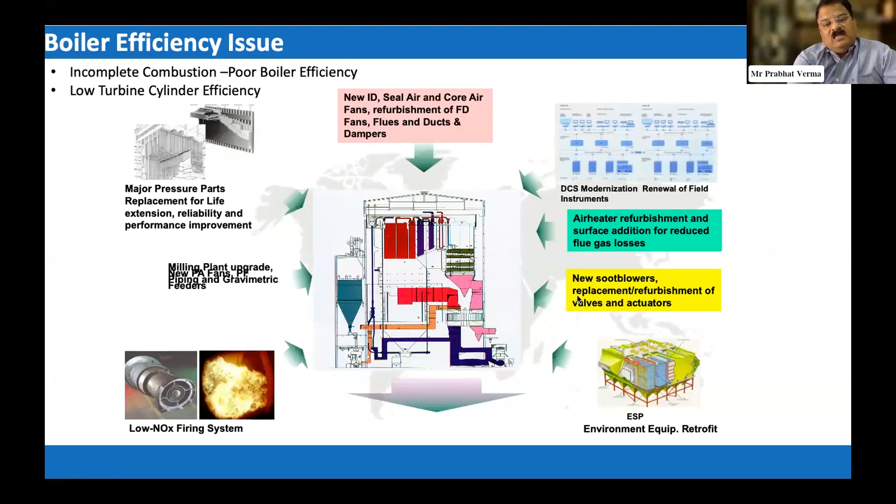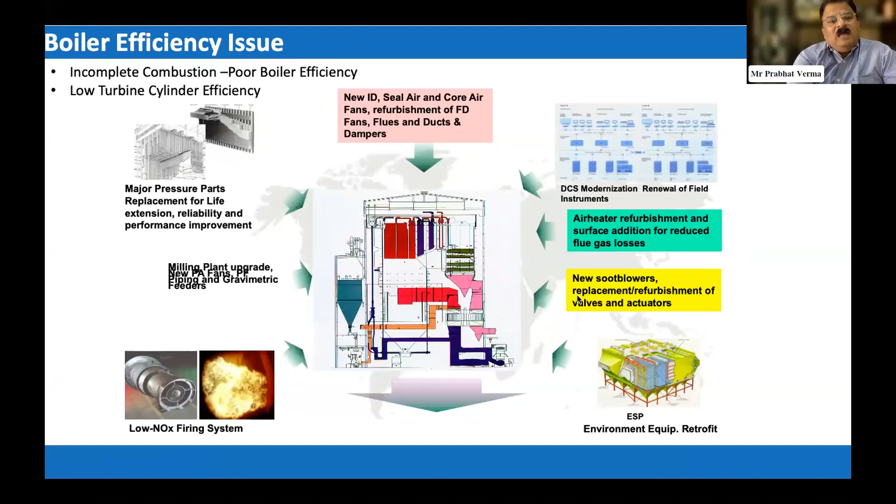I think whatever I talked till now, it is all summarizing and repeating. There is nothing great, nothing new. Now I am a strong believer that boiler tuning, we talked so many things. We talked about flexibilization, we talked about air fuel ratio control, we talked about efficiency, we talked about unburned carbon. I think it all revolves around the boiler tuning.

And if Mr. Chandrasekhar is there, probably he can comment on it. So boiler tuning, somehow I have seen it is like our car. We buy a car, but we hardly go for tuning. We keep on filling the petrol or diesel and keep on running. So boiler tuning is important.

And here I have shown the benefits of boiler tuning: minimizing the unburned fuel, reduced tube failures, improve combustion balance, minimize energy losses, scale down fouling, reduce slagging, diminish corrosion, and of course SO2, CO2, and NOx emission.

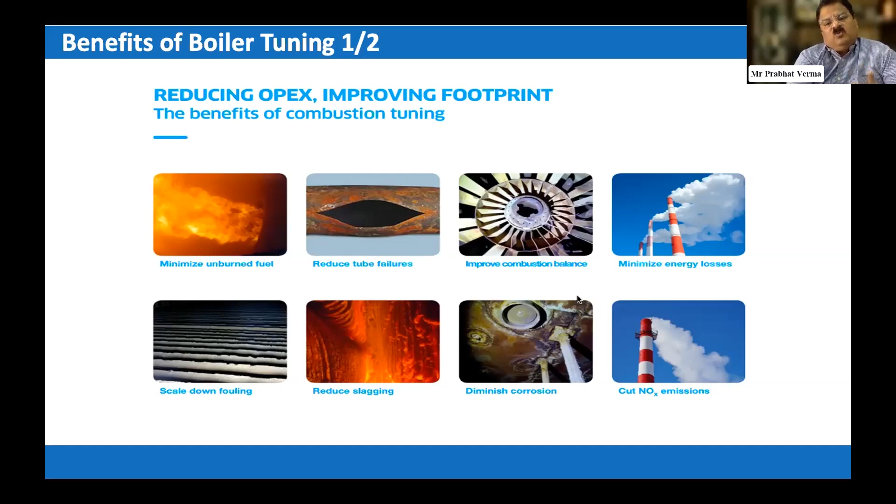So boiler tuning is important. It is related to the O&M day-to-day performance, and I think we must do boiler tuning twice in a year. So these are the benefits. I already shown you the picture in the photograph. This is written in the text, same thing. But boiler tuning is important, which somehow we have no habit to do it on a regular basis.

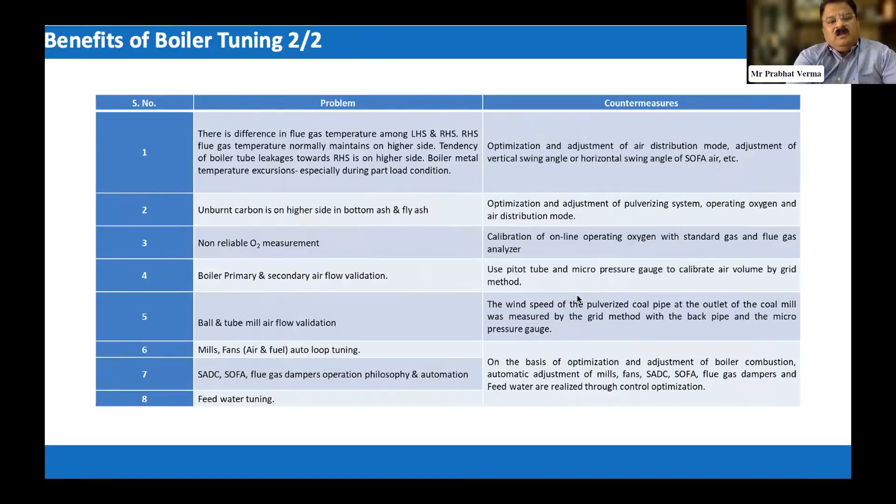Now, everybody talks about a retrofit, a renovation and modernization. With my experience, I wanted to share that when the turbine is retrofitted and it is ready for the highest level of performance, the boiler should be capable of doing and supporting that with the required steam, temperature, and pressure.

So in our experience, what we did, and many state boards and many customers followed, is that they had done the reheater modification also. Just to share, because many a times it is missed, and many a times it creates confusion, because the R&M package of turbine generally is handled by a turbine manufacturer, and then the turbine manufacturer is mostly interested in turbine 3D blades and all those, but he is not bothered about the reheater modification.

So in many cases, what we did, we try to educate the customer and tell them that reheater modification is also important. And I'm sure our colleagues from NTPC and other power companies will agree to it and see that in their future R&M, reheater is given due respect.

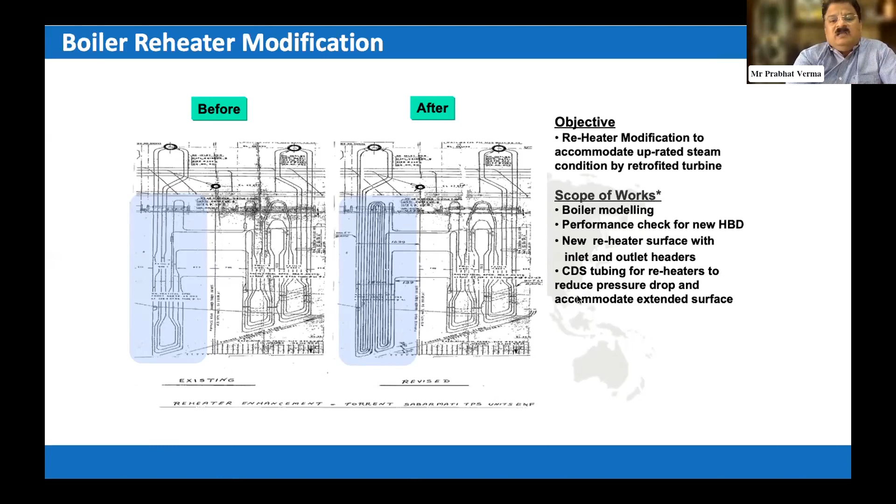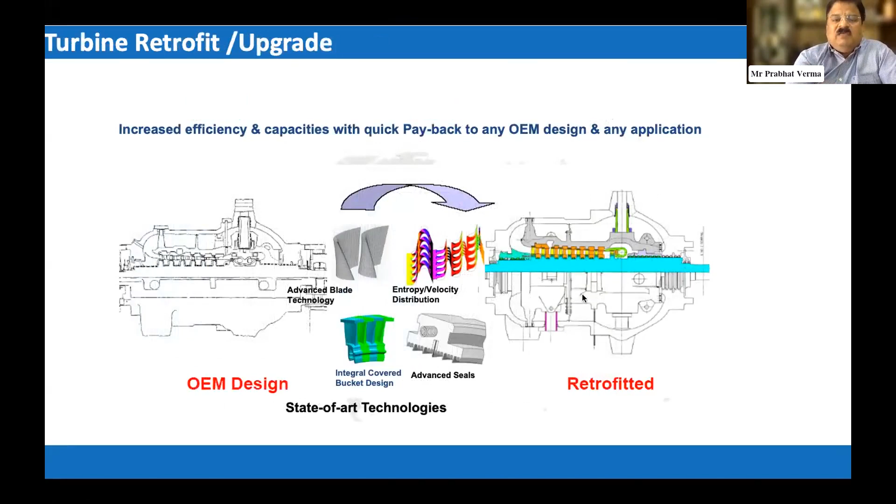Turbine retrofit, it is all generic photographs of how it is done. Just seeing is believing. So just to give you a feel, generator upgrade: there are generators which have a lot of margin, and if it can generate more megawatt, it is not bad.

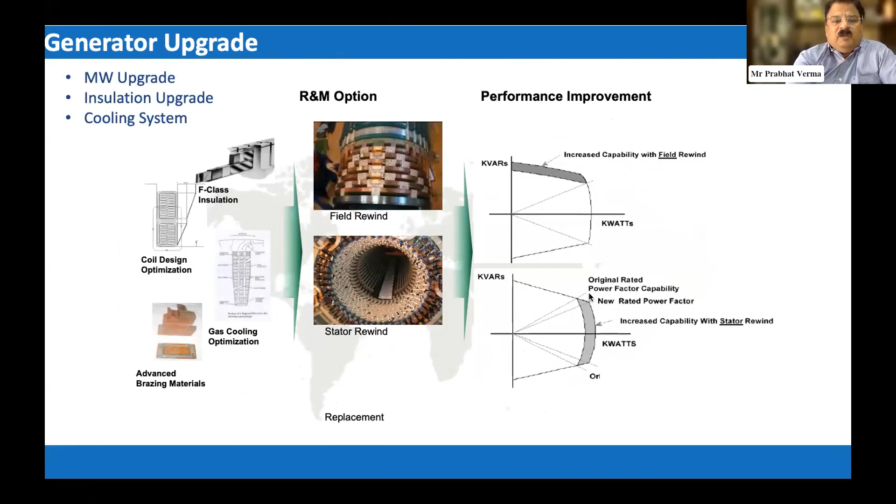As I shared with you about the station, it was increased from 110 megawatt to 121 megawatt. So a lot of margins are there, and this is the time to optimize, to extract the maximum available capacity of the equipment. Now, AQCS upgrade, we already know that FGDs and SCR, ESP, ZLD, all those things are also important to reduce the emissions and effluent and the toxic things which are affecting our operators and surroundings, and causing bad health.

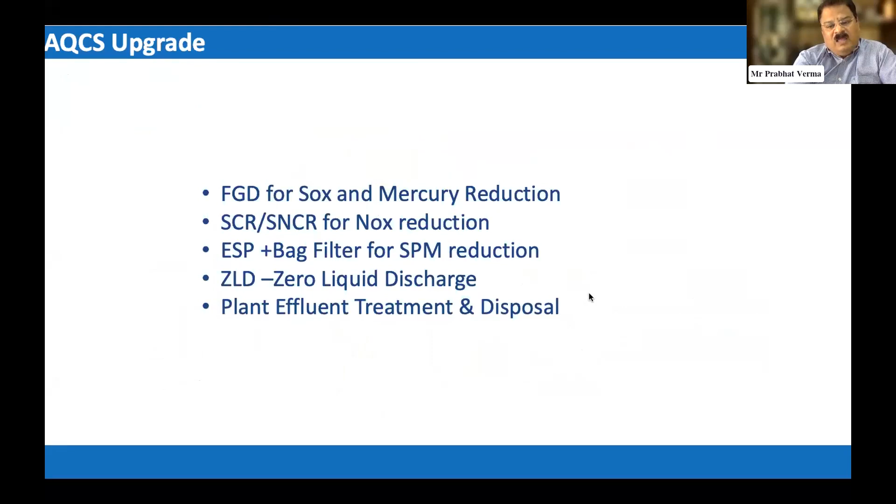So this is important. Benefit of retrofit: there is a case, Ukai Wanakbori, it is taken from the public domain, and you see the difference before R&M and after R&M. So it is evident and clear that RNM has to happen.

RNM is a tough task. I know many utilities are not very keen because it requires time, it requires a lot of patience, it requires sharing of a lot of information, and probably this is one of the reasons RNM has not become very, very popular in this country. Even if RNM happened, it took a lot of time.

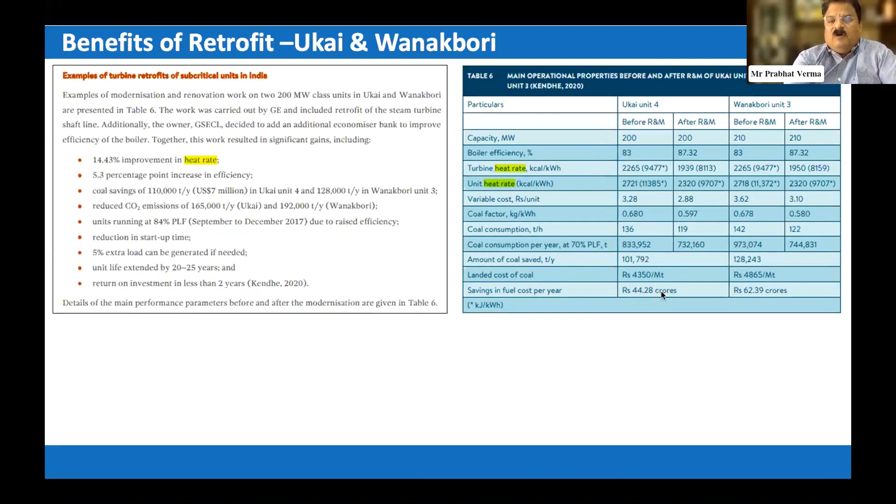I mean, it took years, and people who started the RNM procedure, both on the customer side and the OEM side, they retired, but RNM never took place. So this is the time, since coal-fired power plants are to be kept alive, RNM is important.

And I have taken a list of some of the plants which I could find the data for. Here it is basically a 76,000 megawatt Chinese fleet in India. Why did I take Chinese? Because Chinese are labeled bad for many things, design, so many issues, so many challenges. So what I did, I took the data from the Chinese plants, right from 61.5 megawatt to 660 megawatt, and I tried to do some kind of analysis about their design heat rate and the heat rate improvement which is possible. And during the process, it is just indicative numbers.

I mean, these numbers are not the accurate numbers, but very close to accurate. The idea was to tell you how much coal can be saved if all these plants are done with retrofit, renovation and modernization. And you see yourself, there is a per megawatt 286 ton saving in a year, and huge money which is saved, around 7,634 crore is going to be saved, only from the coal saving itself.

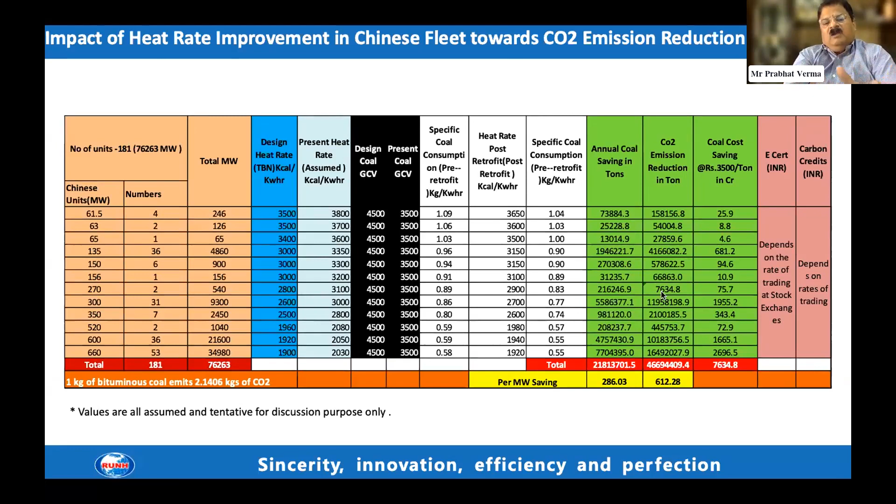So it is not only coal saving, there is a tremendous amount of CO2 emission which is reduced. 1 kg of bituminous coal emits 2.14 kg of CO2. So overall, just to give you a feel, there is a large fleet of 76,000 megawatt. Every power plant is stressed. Efficiency is a big issue in most of the power plants. Heat rate is a big issue. So if those are all corrected, there is a significant amount of cost saving in terms of transportation of coal, SPM, ash, so many things which cannot be quantified, but which can be taken benefit of.

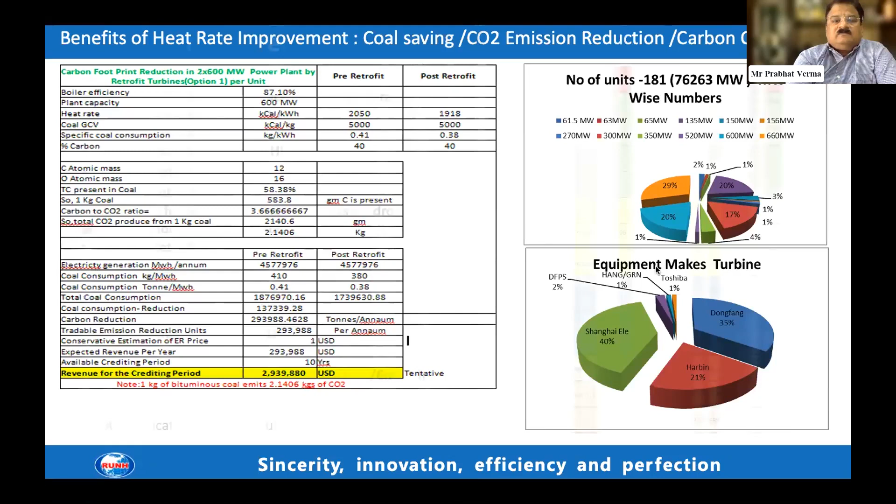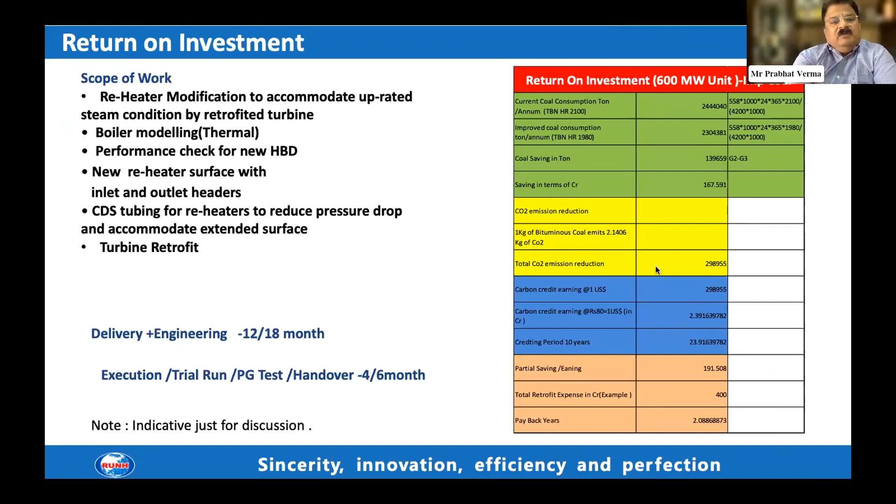So a big amount of money can be earned, a big amount of benefit can be given to the employees in terms of better health. So this is just to give you a feel of the benefit of carbon credits, and carbon credit and carbon market is going to rule this country, and carbon has to be reduced. So return on investment, another case. Here I talked about some payback on R&M, which is around 2 to 3 years. Again, it is very case specific. So just to give you a feel in terms of commercial benefits.

Now, heat rate improvement opportunities and challenges, you all know. Challenges are aging staff, no interest, and you have seen in the last 30 years there has not been much attraction for new engineers to come to the sector. So that is a challenge. Regulatory norm is a challenge. Loose PAT target is a challenge. Failed E-cert scheme is a challenge. Carbon credits are a challenge. Not attractive. Funding issues are a challenge. Limited companies doing it, and the knowledge. And opportunities are, most of the plants are stressed, proven and sustained R&M projects, good payback, OEM with retrofit technology, faster executions. So these are the benefits.

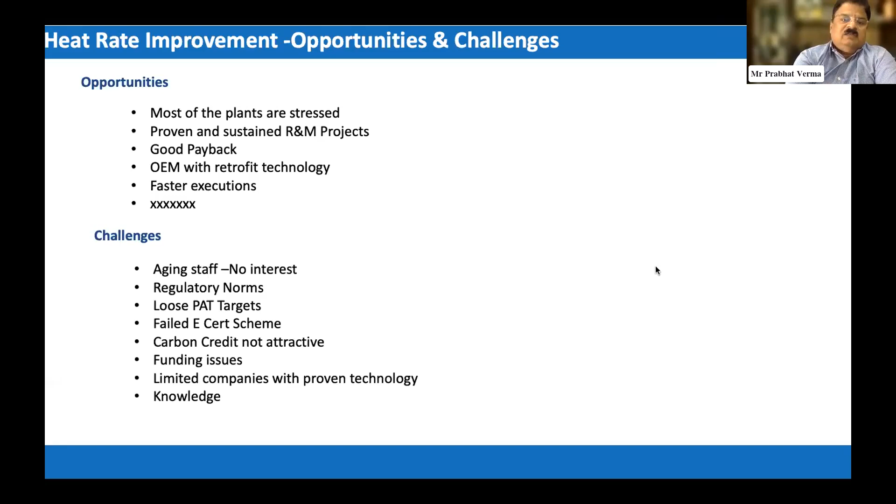Now, my main topic today is to talk about repowering. The idea is how to reduce the carbon and how to use the existing asset. All these coal-based power plants are very heavily designed. Basically, they are over-designed. And once you abandon them, it goes at the price of scrap, which is not the right approach. So these assets and infrastructure can be utilized in many ways. I have gone through what is happening globally, and I have seen many things happening across the globe. So instead of looking towards the globe for everything, why not we start doing this activity and using our stranded assets for various purposes.

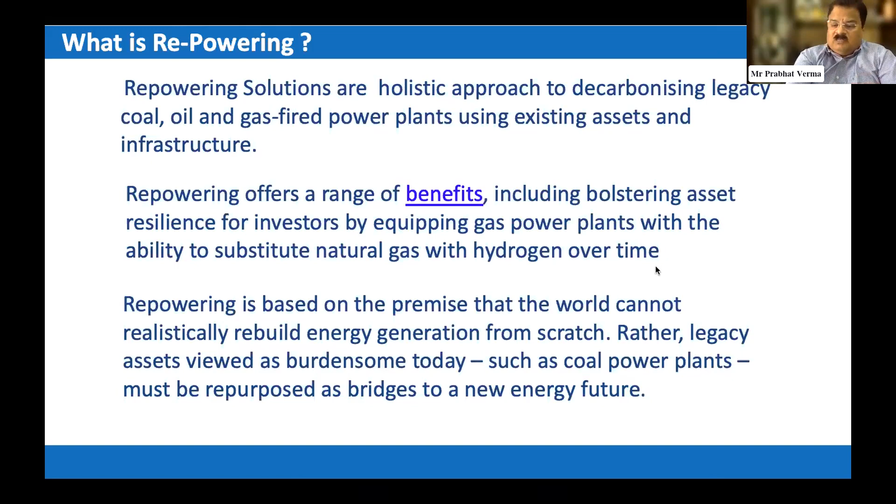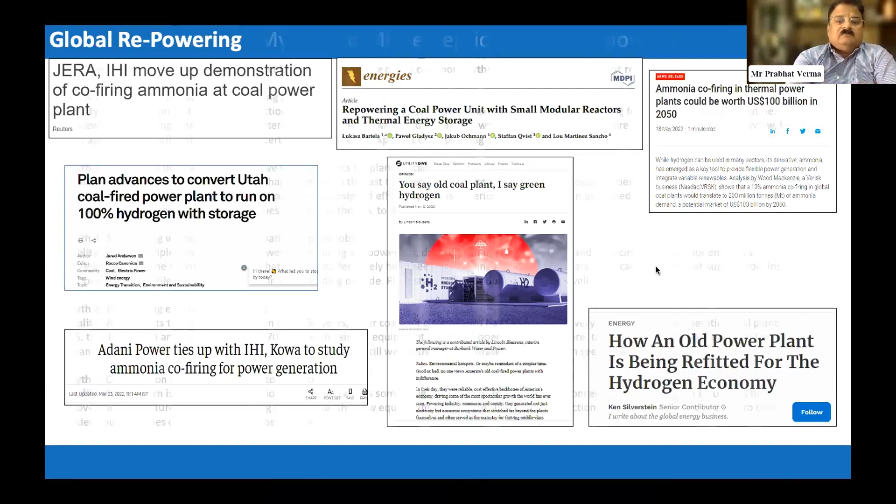So here I have just tried to put my knowledge about repowering, what is going on globally. These are the information I gathered from the public domain, from the media, about many activities happening on the repowering front. Repowering is all about low carbon, no carbon, using the infrastructure and the asset which is available. Now, there are myths around repowering globally, which are answered here. I will share these; I am not going to read it. The first myth is it is too hard to budget a repowering project. It all depends on the willpower. It all depends on your best plan and the engineering abilities and your own ability to sell the outcome of the project. So there is nothing which cannot be budgeted.

Repowered units are not competitive with new units for plant efficiency. Again, this is a myth. It can be proved wrong. There is a lot of engineering capability in our country. There are great consultants. Repowering will lead to the elimination of power plant jobs. It is not true. There are projects globally where the coal-based power plant, because definitely power plant closure is going to create a problem. And India is already suffering. The coal sector has suffered a lot in the last few years because there has not been much focus on coal-based power plants. Though the government never said that coal power plants will not be there, because we have seen a lot of tenders recently from NTPC and they are getting awarded. So coal power plants are going to remain there.

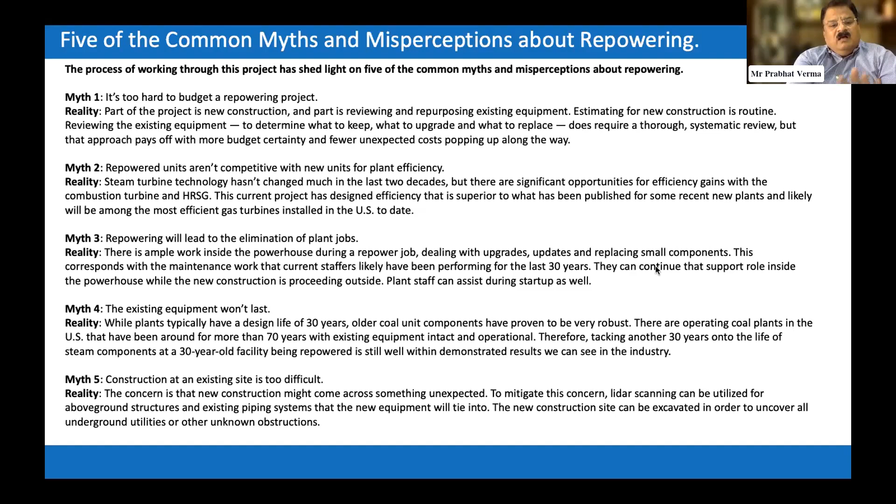And the fourth myth is the existing equipment won't last. Fifth myth is construction at an existing site is too difficult. So all those things are not very relevant, but these are the thought process of people who think about repowering. We can read the answers. I will share the slides for posting on the website.

Now, oxy-fuel technology, it has been discussed a number of times. It's a proven technology, and I personally feel that oxy-fuel can give a good solution to zero emission, because we are targeting net zero by 2070. So oxy-fuel is not something new for us. It's a matter of taking a challenge and working on it.

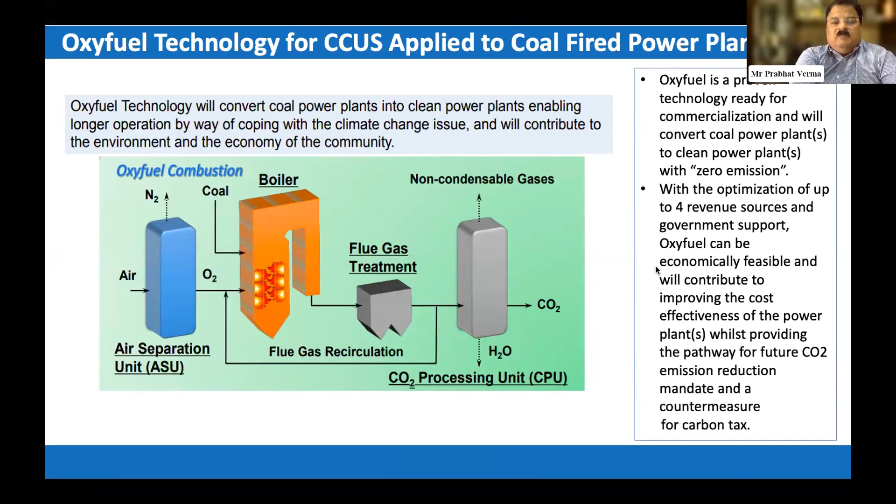So here I have tried to show you a pictorial view of how air separation happens from the air. Oxygen goes for the combustion, coal is added, and then there is FGT, flue gas treatment, and this is how the plant works. So oxy-fuel is one technology which definitely we need to opt for. It has been a proven technology, slightly costly, but I believe if government subsidy is available, it can be made feasible.

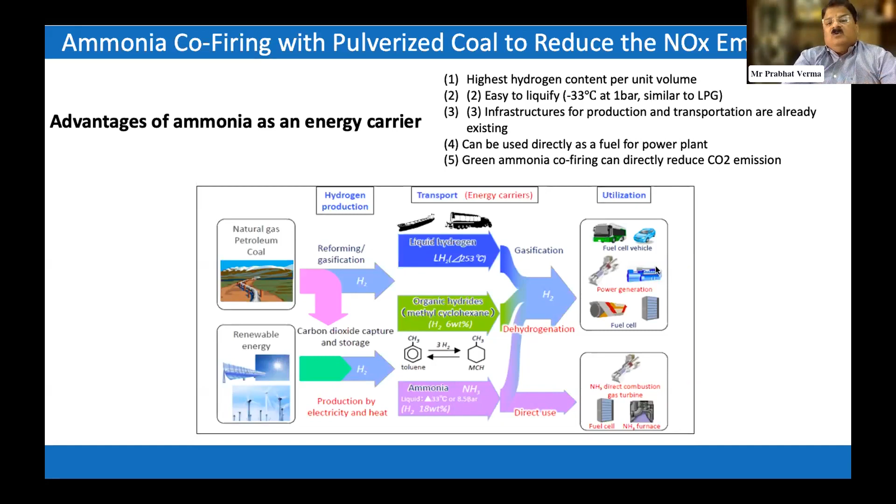Ammonia co-firing, a lot of discussion happening now. Ammonia can be generated from hydrogen, and ammonia is being co-fired in the same coal boiler. IHI has taken the lead, and in India also, I was reading somewhere, Adani has tied up with them. So green ammonia firing is all about reducing the CO2 and using the same boiler with little modification. So this is ammonia co-firing with pulverized coal to reduce the NOx emission, the CO2 emission and SOx emission.

Now, replacing a coal-fired power plant with a combined heat and power gas plant. This is a project which is happening in China. And yesterday, after listening to Ranjan, I found that China is much more aggressive than us on various measures to reduce CO2 emission, though their targets are 2060. And they are a 29% emitter of carbon in the world, and probably their generating capacity must be 5 times what we have in India.

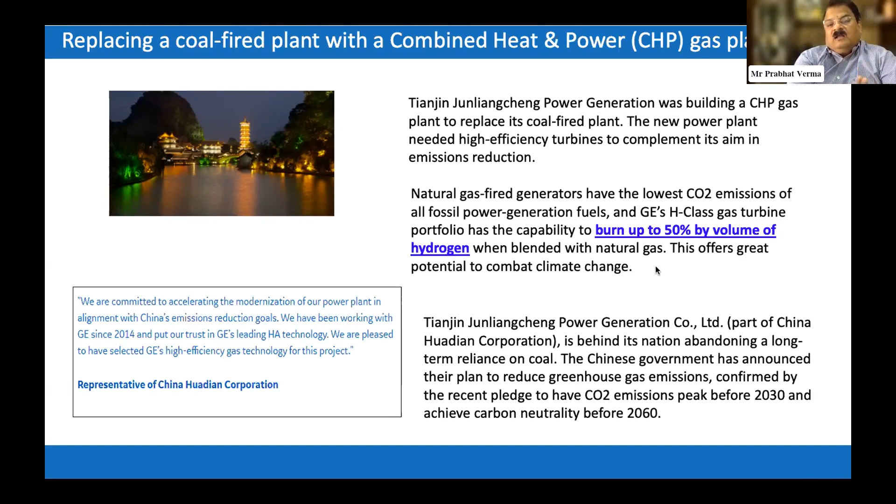So this is the project which is being done for them by GE. So we can have a similar project, and this is going to be beneficial. It is going to be neutralizing carbon and carbon reduction. Even hydrogen can be burned there.

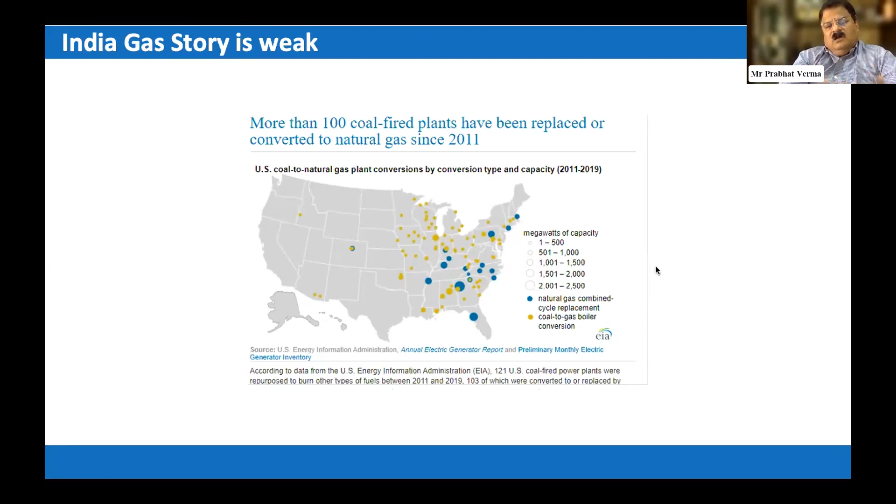Now, in the US, more than 100 coal-fired power plants have been replaced or converted to natural gas since 2011. Somehow, India's gas story is weak, so we cannot talk much about it. But there are turbines available where 50% hydrogen and 50% natural gas can be fired. So there are ways and means to reduce carbon emission, using the available infrastructure and assets.

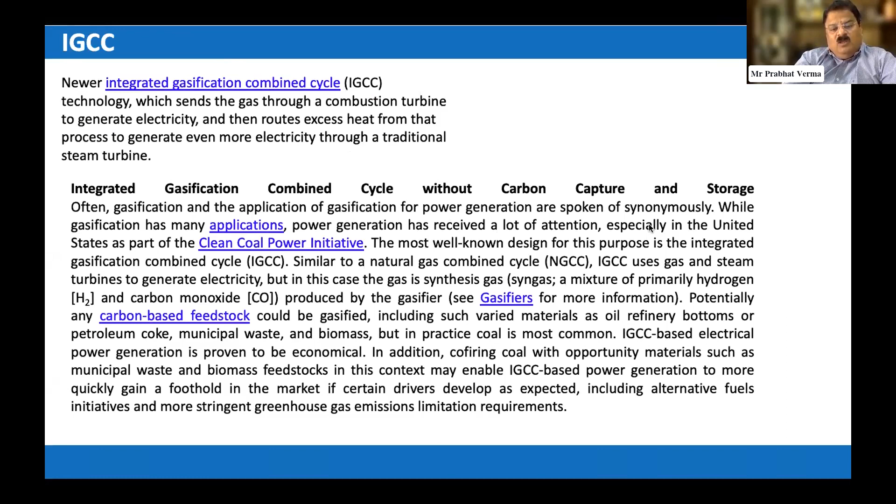IGCC, Mr. Chandrasekhar also talked about it yesterday and today as well. IGCC, my personal take, is not very commercially viable for power generation. But there are companies like Jindal running IGCC plants in India. And I remember there were many projects which started with many collaborations. But IGCC, sometimes I feel, is good for some kind of chemical process. So IGCC is another technology. It has not been a very big success in India because of our high ash content coal. So this is another way of decarbonizing.

Clean coal technology, as we all know, is another. The term clean coal has been popularized by the coal industry, electric utilities, and policymakers. It refers to the hopeful notion that technology will enable power plants to burn coal and release far less pollution. C.C.S., which stands for carbon capture and storage. Carbon capture and storage is definitely the talk of the town today. A lot can be done in India.

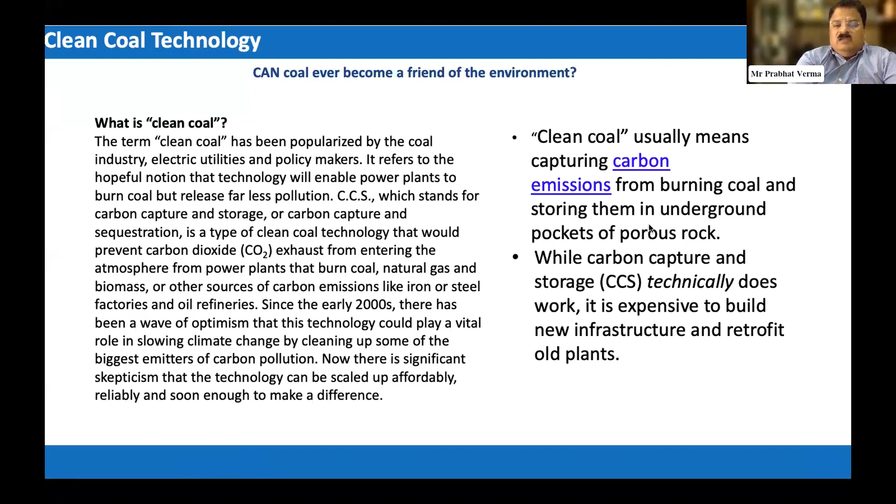Somehow we are again looking westwards, and there are some projects going on in India. There is a need for IITs and local companies to work on it and develop our own clean coal technology. So clean coal technology is another area where we can think of adding some of our infrastructure and assets to have our own indigenous Make in India technology.

Repowering coal to natural gas, to 100% hydrogen. Utah is the place in the US which has replaced a 1.8 gigawatt coal-fired power plant, and now they are putting up a hydrogen plant there, and a gas turbine to burn initially 50-50 natural gas and hydrogen, and then by 2045 they switch over to 100% hydrogen. Again, it depends on support from the OEM, but it is a very good project. It is a very futuristic project.

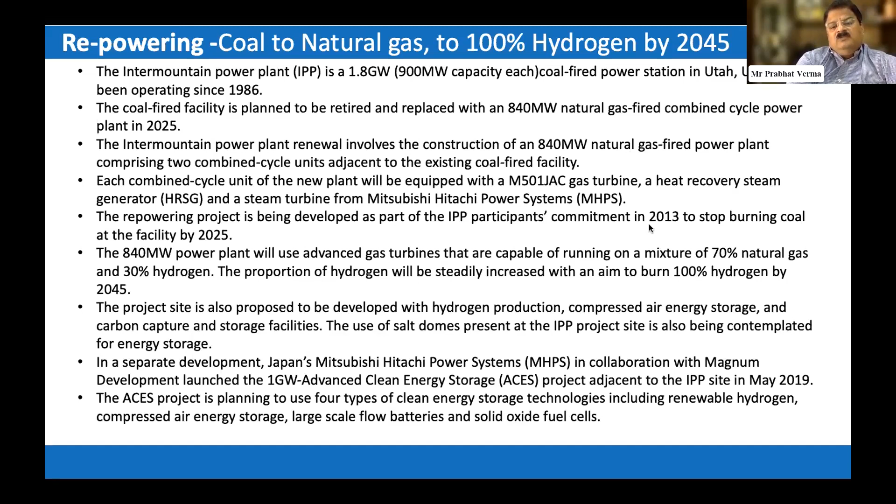Because Mr. Chandrasekhar talked about power going out of the PPA regime and all. I think which is very unavoidable. I mean, this has to happen. So time will come, because the plant has to survive, the plant has to make money, and then there should be a tariff; it should be opportunity-based costing. So in that time, the energy arbitrage kind of approach helps to use this stored energy.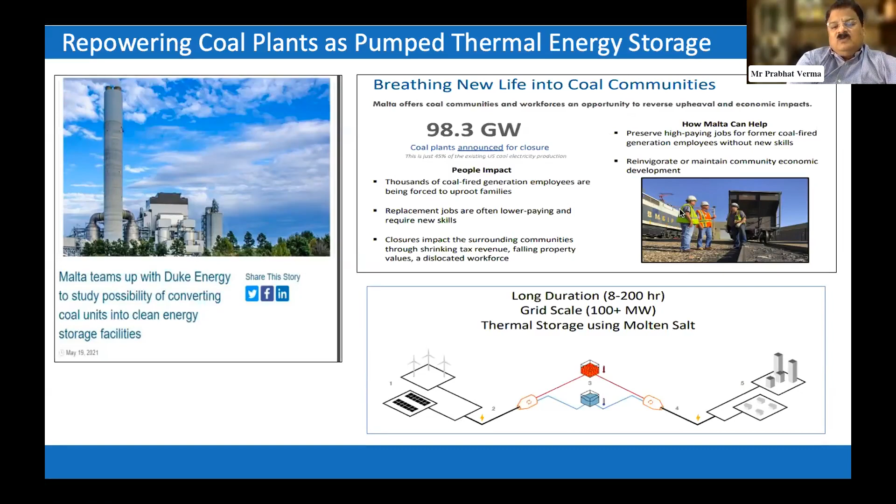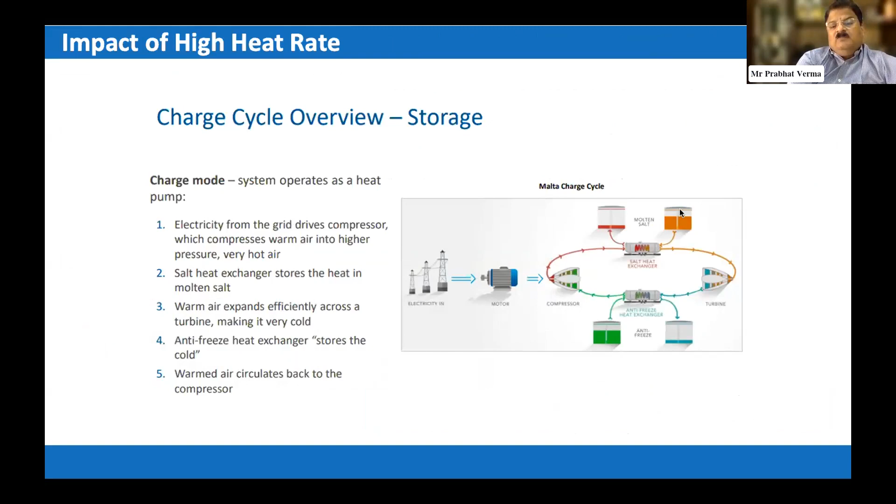So this is about the same technology we talked about, impact on high heat rate, then impact on high heat rate for storage. I will share, you can read it more in detail. These are all good information. Malta is the company which is working on this project. It's a thermal storage project. This is a 100 megawatt project, and this can give you power for 10 hours.

In India, at the most, what we are talking about is a lithium ion battery, and battery is a hazard. Battery recycling is another issue, and I'm not very sure. I see a lot of tenders coming out with huge capacity, 10 megawatt hour and all those. So I personally feel that we have to have a long duration, sustainable energy storage system. Lithium ion performance is yet to be seen, though there is a lot of discussion, a lot of betting. We talk about tariff and so many things.

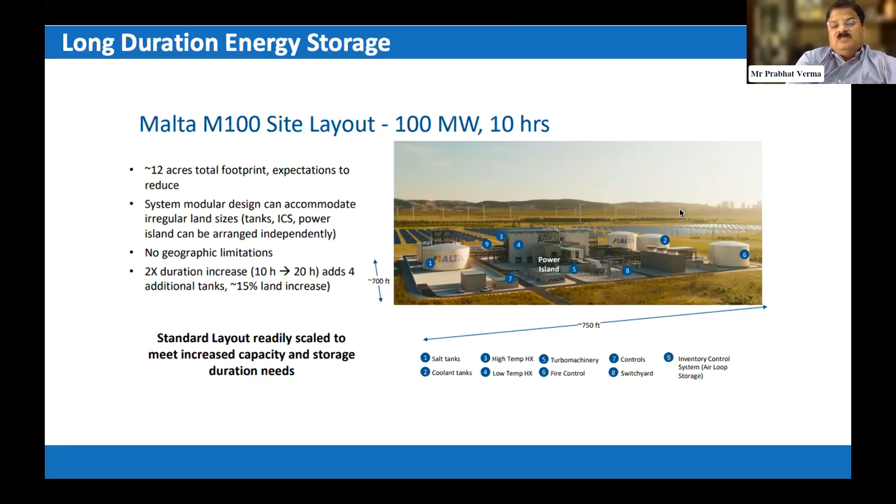So Malta is one company which is developing, and Malta has a lot of Indians working with them. So this kind of project can work in India also. It needs the large business houses' support, government support, and Ministry of Power support.

Replacing the coal-fired boiler of an existing coal plant with a carbon-free small modular reactor. Now, another concept many companies are working on, including the company I used to work for, Doosan Power. They have developed SMRs, and these are all factory-fabricated SMRs available up to 300 megawatt. And these can utilize almost 50% of the assets and the structure of the coal-based power plant. So this is another area.

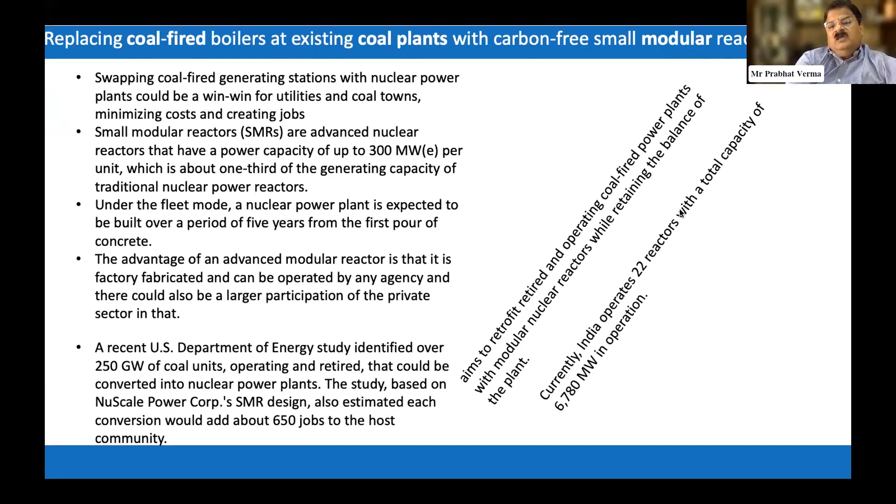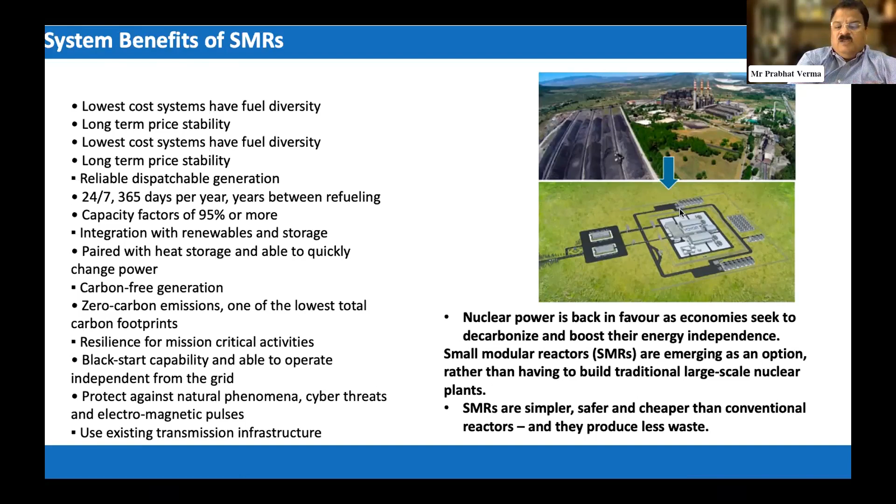Nuclear is always politics. It depends on the government policies. But the small modular reactor technology is one of the futuristic technologies towards decarbonization. This is a pictorial view of one of the plants where SMR is implemented. You see the size of the coal-fired power plant at the top, and at the bottom you have an SMR technology power plant of the same capacity. There are system benefits, low-cost system, fuel diversity, long-term price stability, and so on. There are so many points, you can read it. So this is about SMR technology.

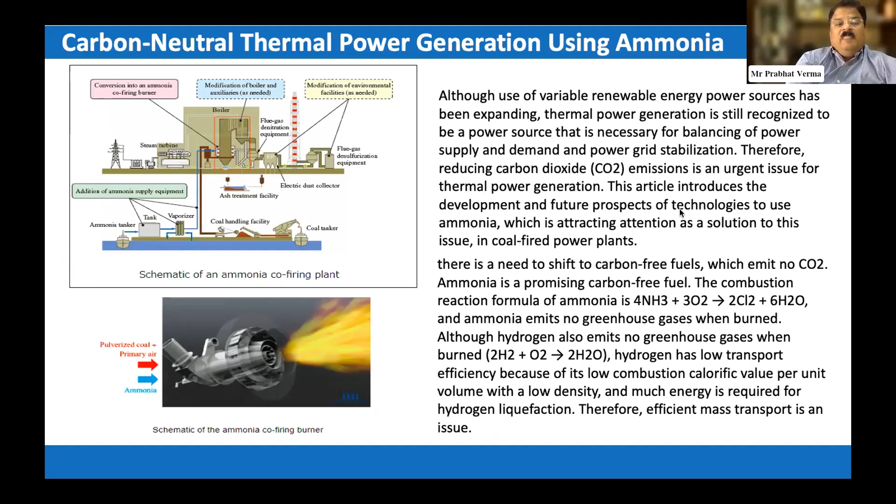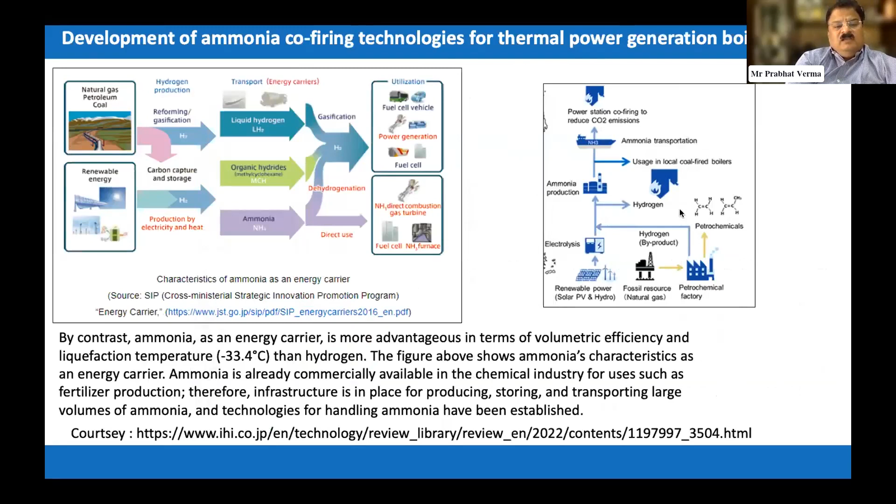Carbon neutral thermal power generation using ammonia. We already discussed. And you see how ammonia is fired in the same burner. Maybe the burner is different, but then ammonia firing, and a lot of ammonia is being generated in India also now with the same hydrogen plant. So there is the option of carbon neutral thermal power generation using ammonia. This is another view; IHI Japan is taking the lead, and there are some projects ongoing. We can have a similar project in India also, and probably we can succeed much faster.

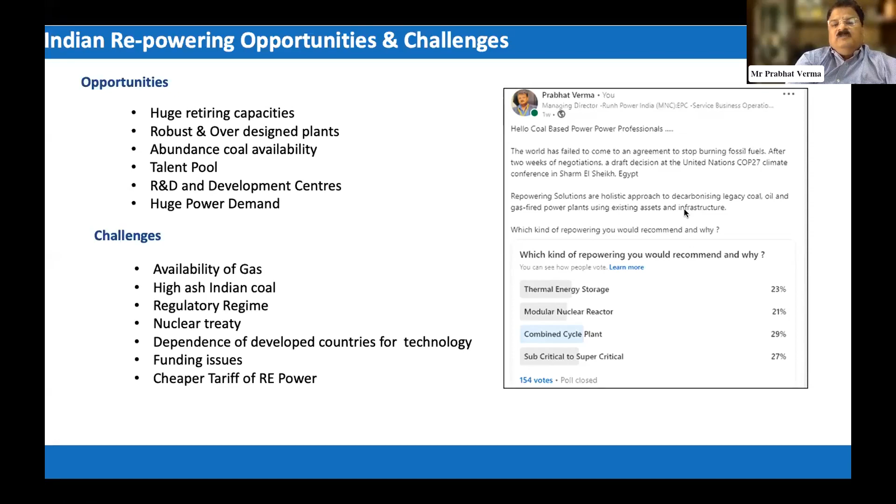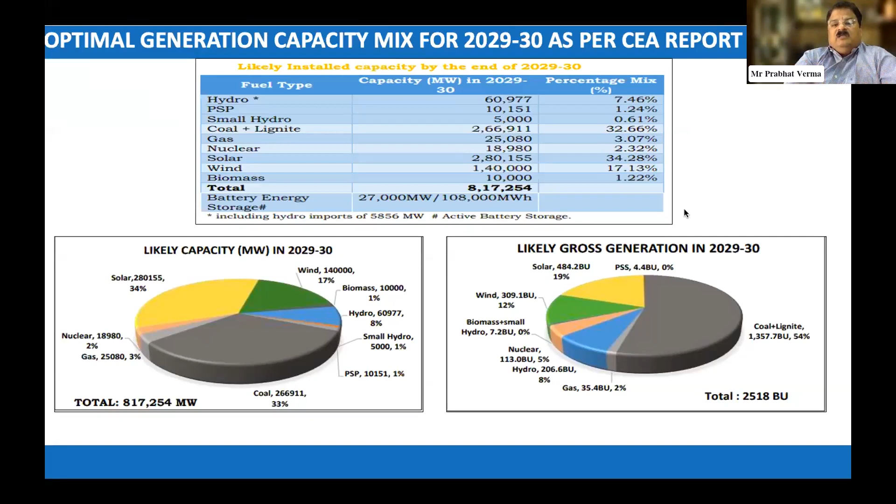So this is about the plan for 2030. Coal is going to remain. All others, wind, biomass, nuclear, have to grow. A lot of capacity is being added. So this is about our 2030 plan, and this is taken from the CEA report. So this is all from my side. Views expressed in the presentation are all personal to the author and only for discussion. Data and photographs courtesy of various websites and the public domain.